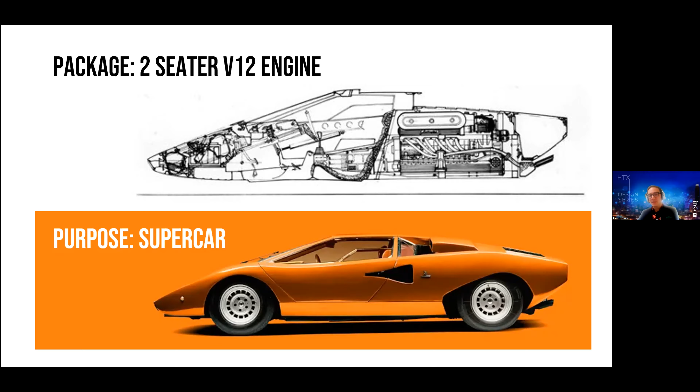And it was extremely successful. So now as we move to the EV package, things look a little different now. And this is a great thing because now you don't have this gigantic engine that takes up all this space, right? So the EV package, you should look at it as an opportunity to do more with the vehicle than you could ever do before, right?

In a way, it presents multiple different purposes where you can have the same platform and do different types of vehicles. Now, this hasn't come mainstream yet, but trust me, I'm pretty sure some of the major OEMs are working on modular platforms so they can achieve something like this.

So the question you ask yourself as you guys go forward in y'all's project is, okay, in 5 to 10 years time, what kind of cars will be relevant as we approach the age of autonomous cars, right? Because everyone thinks, oh, we're gonna go autonomous and that's just gonna be it.

No, it's not. That's not the way it's going to work. In my opinion, the cars that will definitely survive the autonomous age as we approach it will be the SUVs for families. Ferrari just came out with an SUV, Lotus came out with an SUV. SUVs are going nuts right now. Everybody loves SUVs because it's the family vehicle of choice.

If you want to go to the autonomous route, you're going to start seeing robo-taxis come out, like the Zoox, where it's 100% autonomous, and this will essentially be your Uber in the future.

The truck will also remain relevant simply because the truck is a workhorse. It's used for jobs. So you will definitely see the truck still going around in the autonomous age.

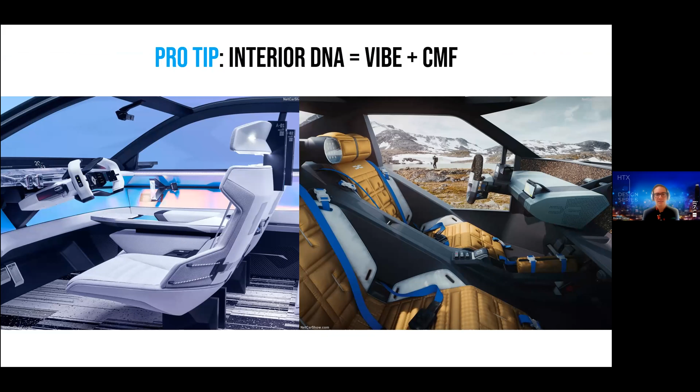A pro tip on interiors: to really drive the DNA home, focus on combining vibe with CMF. So CMF is color, material, and finish. And as you can see, the CMF on these vehicles is amazing, and it really elevates the design, bringing out a whole new aesthetic to it.

At the end of the day, when you design the DNA, there's no right or wrong answer. It really just comes down to taste. So just have fun with it, explore, and really just do what you think is right.

Now I'm going to go into the actual design process. It's actually very similar to industrial design, but the best way I can explain the design process in automotive that I've seen is we follow this general rule: the 100 foot, the 10 foot, the 1 foot, and the 1 inch. This is basically how you start designing the car. On exteriors, the 100 foot away is like, what would the car look like if it was 100 feet away?

These sketches are very loose, very dirty, very quick. You're essentially just trying to figure out what is the shape you're trying to go for, what's kind of the theme you want for this vehicle. Again, very, very loose, very dirty.

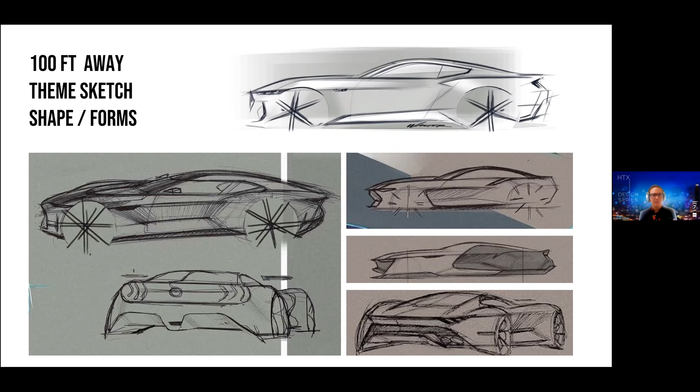Then once you have something you like, you go into your 10-foot away. Now you're looking at, okay, what do the shadows look like? What do the reflections look like? What's the surface doing along the body side? How does that surface transition into the front? How does the rear transition into the side? Things like this, focusing on different views and focusing on proportions and the surfacing.

Then once you have something you like there, you can start focusing on detail stuff. So you're 1 foot away, and you can really start to look at, okay, well now what do I want the tail lights to look like, what's the detail of the tail lights? You can really kind of do variations on that, and that'll change the look of the vehicle on its own. So you can spend time on this too.

Finally, once you have all those things ironed out, you go into the micro details. Now you're looking at fillets, cut lines, radiuses. It takes a long time to get to this part, but nonetheless it's a very important part. And honestly, this part takes a lot of time when trying to bring a car into production.

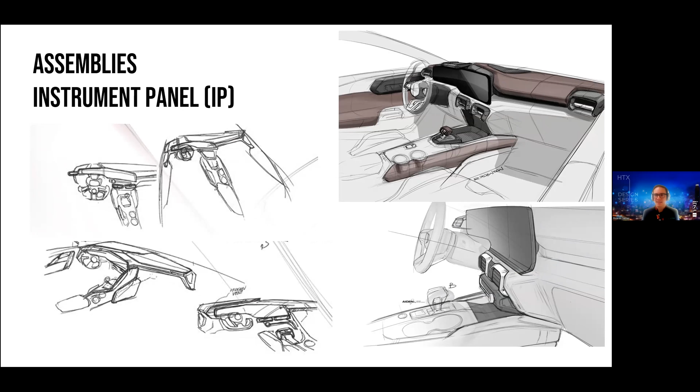Then once you've got something that you're kind of liking, you go to a little bit higher fidelity sketch, go into different views, and you start adding your shading and different color patching and things like that. And you start to really understand, okay, what's actually kind of happening here.

And once you have something you like, then you can go into changing up the views, looking at it from different viewpoints, and also adding variation to the design. So like, okay, I want 2 screens, or I want 1 screen, or I want 1 panorama screen, or I want the IP to do something different, or come up, or go around the passenger, however you want to do it.

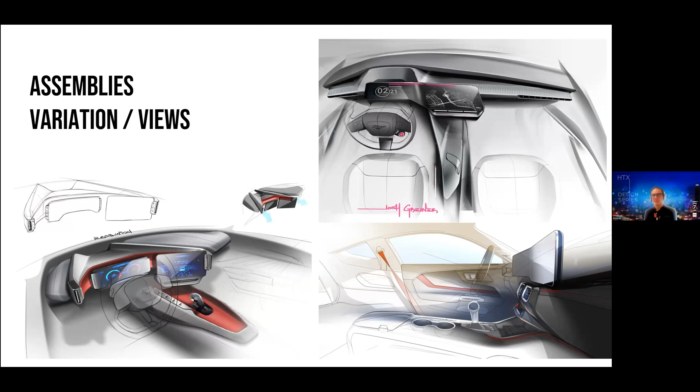Once you have that, you go a little more focused and start looking at the components of the interior. What are the AC vents going to look like? What's my steering wheel going to look like? What are some of the buttons? What is the CMF going to look like? What are the colors, material, and finish I'm thinking about, and where can I place those?

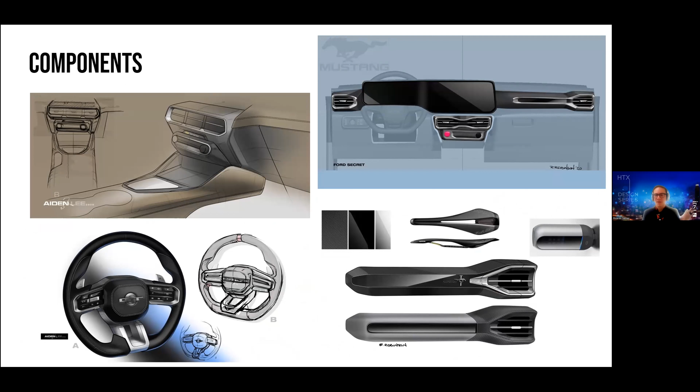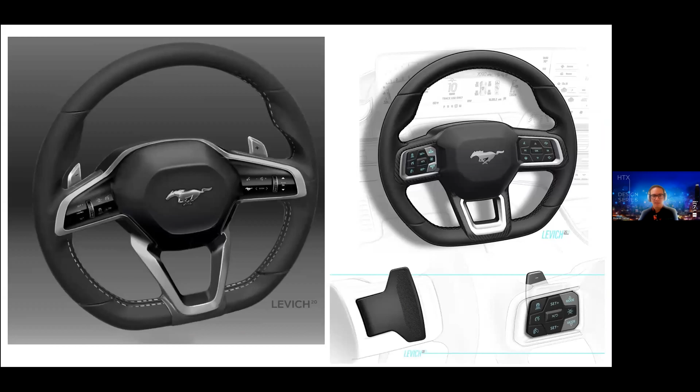You can really nerd out on this kind of stuff. You can get really detailed in the buttons, just looking at how the volume knob looks, the button placement, handles. You can go really, really detailed. Same thing with steering wheel. We have tons of steering wheel concepts until you finally narrow it down to the final one.

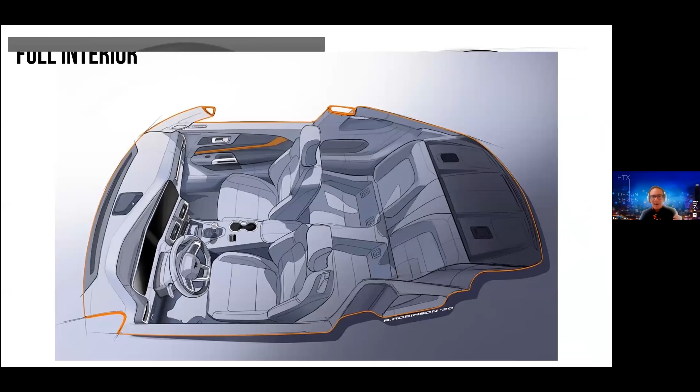But again, you treat it the same. You start off very general, then you start focusing on details like buttons and so on and so forth. Finally, once you have all these components, you can put them all together like a puzzle, and you have this complete interior.

So this is the goal. This sketch was obviously drawn after they've had all these things in place, and then they put them all together. From here, you can start to understand what's working, what's not, is everything talking to each other? Does the door intersect the IP in a good way? What's that interaction like? What's the center console intersection with the IP?

What do my seats look like? Do they have the same design language? Things like that. Then you can switch it up and go into more detailed renderings, where you really start to see it. Now this is exciting because you're like, okay, cool, this is really close to what it's going to look like. These sketches are really good to go back and forth with CAD, and you can start to understand how this is going to happen at the end of the day.

So once you have all this done, you go through the modeling process of CAD and clay and all these things. I haven't mentioned CAD and clay, but it's definitely part of the process. Then again, you go into your press sketches. This sketch here was most likely done after the fact, after everything's been designed. They go over CAD, do some overlays, and you get this super awesome sketch. Press sketches drive a lot of hype.

So to recap on those two things, if you're focusing on exterior, start off with looking at the shapes, the forms, then go into your surfacing proportions, then go into your components, your wheels, your tail lights, your mirrors, then finally the fine details - your fillets, your radiuses, and things like this.

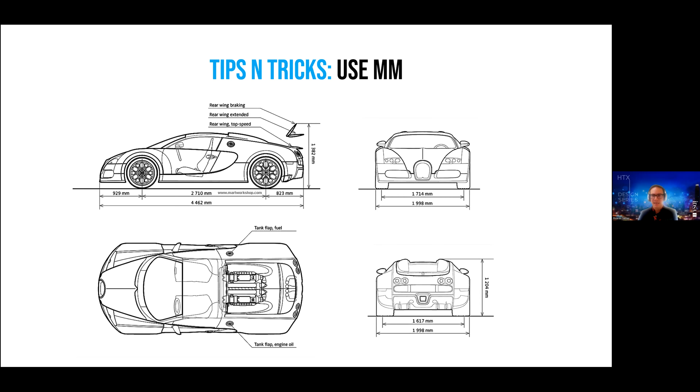Secondly, it's okay to do underlays. People see these sketches and think, that's such a nice sketch, I wish I could sketch like that one day. You can, it just takes time and practice. But there's no reason you can't use it as an underlay.

This is very helpful for me when I was used to doing supercars and then I had to jump on an SUV. My proportions were completely out of whack, it was so bad. When I finally started doing overlays, I trained my hand on how to sketch SUVs proportionally correct.

The next tip and trick is Blender right now is the plug. I'm obviously pretty much always on Instagram looking at car design stuff, but the people coming out with these models in like 2 days using Blender is amazing to me, because I use Alias, which is the industry standard for automotive design. Alias is more geared towards, you can do concept stuff on there too, but it's definitely the go-to for going into production.